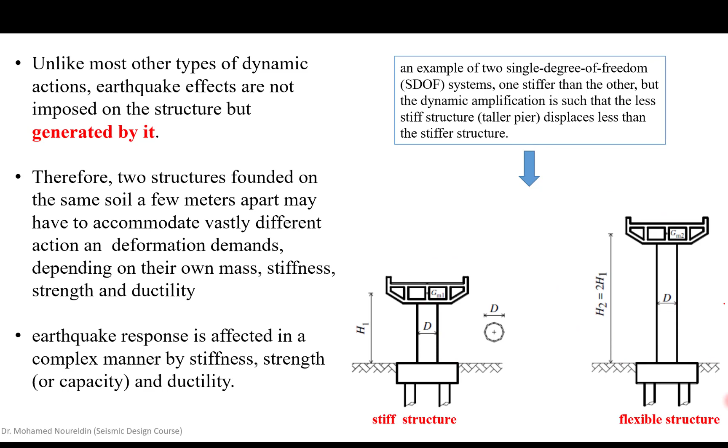Change in stiffness causes detuning of the structure and the input motion, hence also affects amplification. So this is one thing that you need to understand regarding stiffness. Changing the stiffness, as we have done here, this is less stiff than this one. This means that the dynamic amplification factor here is going to be less.

Strengths: if we're going to talk about strengths in the same context, limits describe the region where the structure is able to sustain irreversible damage, hence absorbs and dissipates the seismic action. So here, let's have this. If this is the structure here, this is the force, the lateral force or the base shear, and this is the deformation.

So what we're talking about here is, at this stage, stiffness is going to control. After a while, we're going to find that the structure is changing its stiffness. Then we're going to talk about the strengths here. This is why he's talking about damage, irreversible damage. We are talking about the nonlinear range here.

Okay, strength limits therefore lead to the next phase, which is the inelastic ductile response. This is the second stage. So we can say this is the first stage, from here to here. Then this is the second stage, and then till the end we are talking about the third stage. Here stiffness is controlling, here strength is controlling, here ductility is controlling. Ductility is related to energy, always energy or the maximum deformation. Now understand it as for maximum deformation.

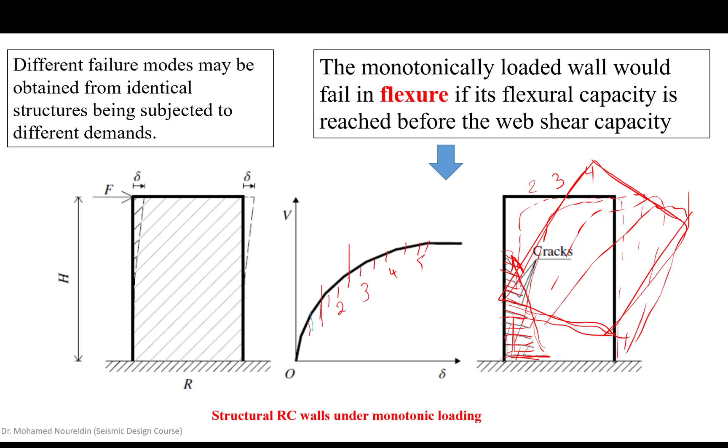It is exactly cracks here. The cracks are larger at the bottom and smaller at the top, and we find that the entire structural wall is going to deform or collapse under bending moment, under flexure. So the failure mode here is a flexural failure mode. This is under the monotonic loading. If we go to the severe case of cyclic loading, it means that the load is going back and forth as we indicated here.

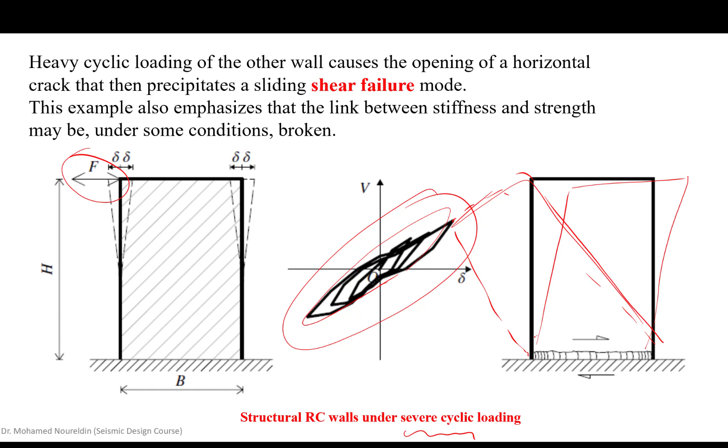Under heavy cyclic loading, you're going to find that the structure is going like this one time, and then it would go like this another time. Okay, this means what? Actually, the cracks are not going to propagate along the height, but another type of failure mode would be triggered, which is the shear failure mode. This is what we call the shear failure mode.

Okay, so we have different types of failure mode based on the different types of applied loading. This is very important, and it has paramount importance in seismic design in general: we need to understand the seismic input or the seismic loading. What is the type of the seismic loading itself? Whether it is monotonic, as we use in pushover analysis, for example, or it is severe cyclic loading, which is very similar to the earthquake.

Actually, the earthquake is very similar to this severe cyclic loading, going back and forth severely. But this one is not right, or I do not want to say not right, but actually it is an approximation, and maybe it is not representing well what the earthquake is going to do to the building. Okay?

Anyway, what we want to conclude from these two slides for our failure modes is, if the input loading is different, this means that the seismic response of the structure is going to be different, and the failure mode is going to be different. This is what we want to highlight in this part of the video.

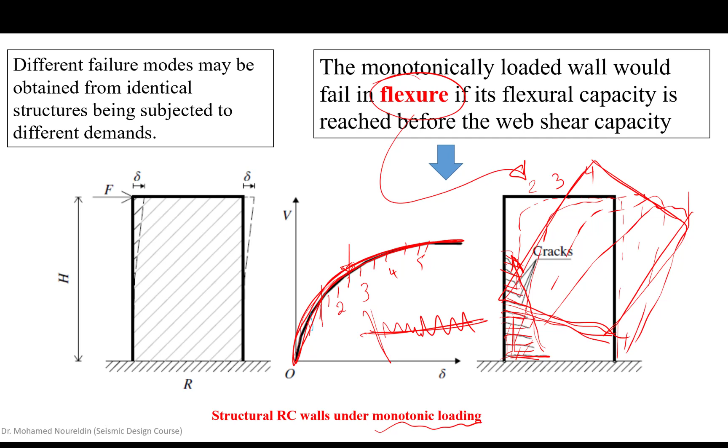Okay, now let's go to the last part, and after that I'm going to wrap up this video. I'm going to talk about the socio-economic limit states, and they are actually important for our understanding whenever we are going to design our structures. And as we are going to see in performance-based seismic design, we need to understand the meaning of socio-economic limit states. Okay, so let's go to some important definitions.

I'm sure that this video is full of definitions, a little bit long definitions and sentences, and there are not so many fancy figures, but I am sure that this video is very important for making the right foundation for seismic design. If you understand the items and the definitions that I have explained here, you're going to find that you smoothly understand the procedures needed for seismic design.

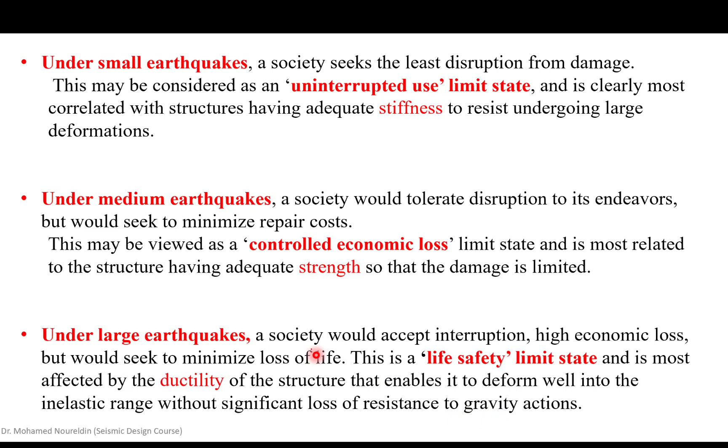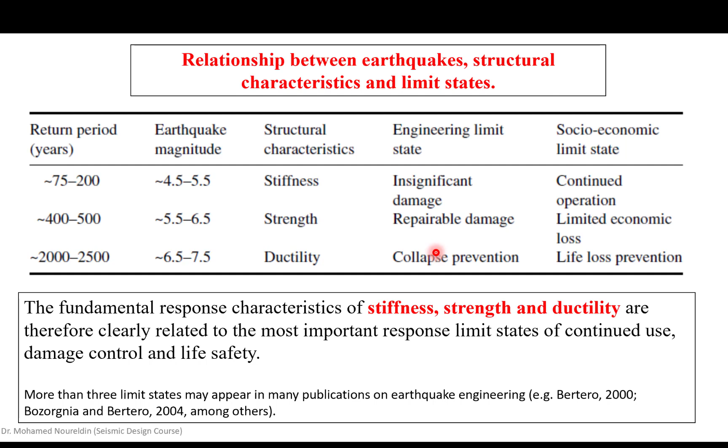Okay, so this wraps up our video for today. I'm going to recap what I have explained. I have given some definitions for strength, stiffness, and ductility, and after that I explained strength versus ductility based response, the difference between direct design and capacity design, and the advantage of capacity design over strength design.

I also elaborated on the difference between direct design based on force and ductility based design. For the third point, I talked about member versus system level considerations, explaining that we need to consider the force deformation relation at the member and component level, and then at the system level.

Then I talked about the nature of seismic effects: systems with different structural characteristics under the same seismic excitation are going to respond differently. Then I talked about failure modes. Based on the seismic demand or type of imposed load, we find different failure modes, such as the flexural failure mode and the shear failure mode.